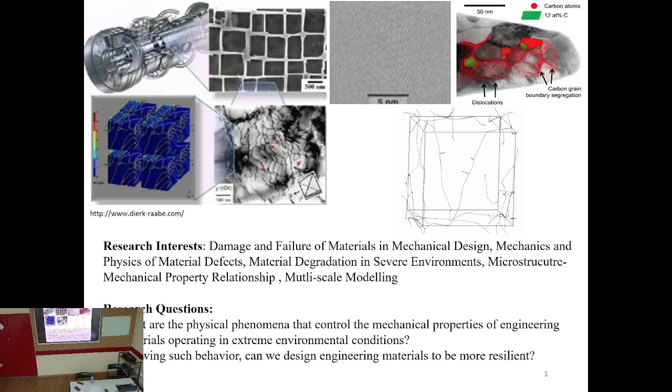Two main questions I'm trying to answer in my research are: what are the physical phenomena that control the mechanical properties, also in extreme environment conditions? And if we know this behavior, can we design more resilient, better materials?

So today I will focus first on hydrogen embrittlement, and the outline also includes dislocations, which dislocations we have in different crystal systems, and some strengthening mechanisms. These include solid solution strengthening, precipitation strengthening. I'll not mention grain boundary strengthening or strain hardening, but I assume you guys are familiar with these issues.

Let's start with some basics in hydrogen embrittlement. After some amount of atomic hydrogen, we see a dramatic decrease in macromechanical properties, like the ultimate tensile strength. Sometimes we see increase in yield strength, but ductility is reduced, impact strength reduced, toughness reduced, even at quasi-static strain rates and also high strain rates.

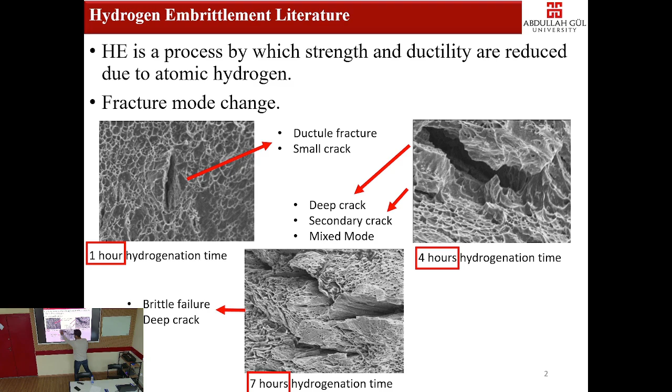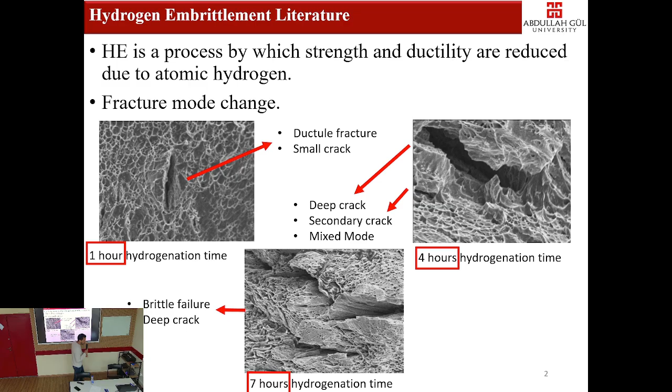We have some experiments, so hydrogen causes some problem in metals, and we have to understand what this problem is. Hydrogen changes fracture mode from ductile to brittle after even 7 hours of hydrogenation. These are the same materials; the only difference is atomic hydrogen. It becomes like, we have a steel, it becomes like a glass. It's due to just some amount of atomic hydrogen, and it causes catastrophic failure.

So I try to keep my slides at master or PhD level, so I'm sorry about the professors - this could be boring for you. But there are some ways that hydrogen can enter into the materials. I just try to summarize. So in order to talk about hydrogen embrittlement, hydrogen should be there.

The first way is during manufacturing, could be casting or other methods. During solidification, the solubility of hydrogen in liquid is pretty high. During solidification, some of this hydrogen just stays there. We call it as-cast hydrogen, due to the casting.

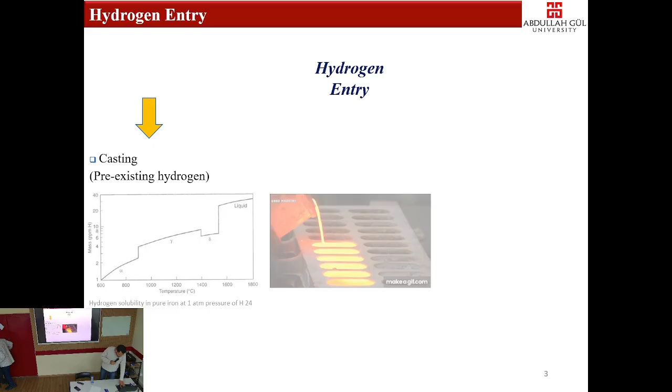After some manufacturing operations like laser cutting or welding, we get more hydrogen, and during use in the environment, hydrogen can also diffuse into the materials.

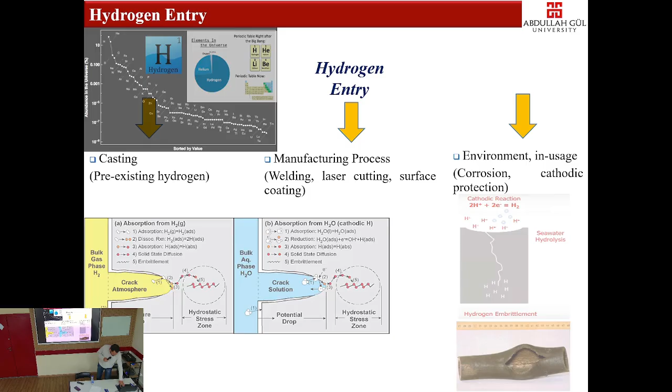Once hydrogen diffuses into the material, it can be localized at trap sites, or it can continue its motion, like diffusible hydrogen or trapped hydrogen. The trap sites are grain boundaries, phase boundaries, voids, inclusions. We have several trap sites for hydrogen, and mostly the interaction of hydrogen with defects is the main controlling mechanism of hydrogen embrittlement.

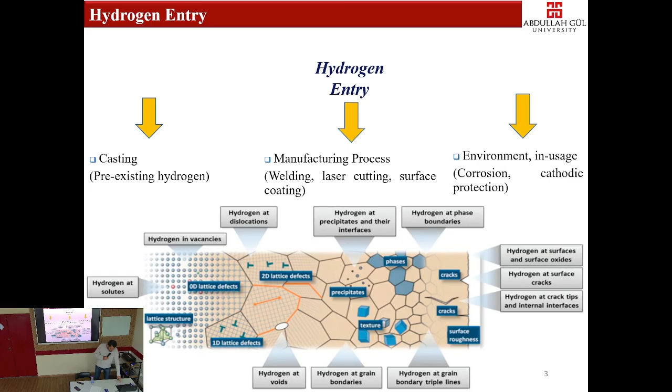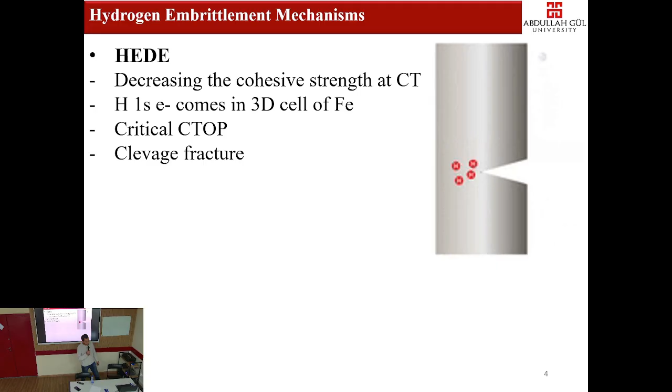So diffusible hydrogen and their interactions with defects - there are several mechanisms proposed to understand, to explain hydrogen embrittlement. I tried to summarize some of them. Hydrogen enhanced decohesion is one of them. It states that hydrogen, while it's moving, decreases the cohesive energy between the bonding, and it causes brittle failure - hydrogen enhanced decohesion. The second mechanism is hydrogen enhanced localized plasticity.

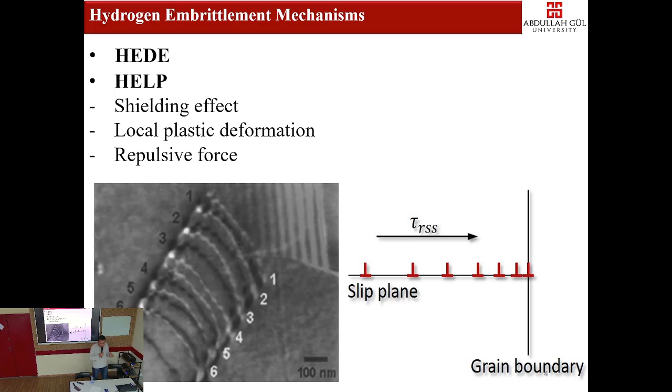We know that dislocations have some stress field, tensile stress field and compressive stress field, and interstitial hydrogen also has a stress field. According to this mechanism, hydrogen can shield the stress field of a dislocation and increase the mobility of the dislocation, creating some localized plastic deformation. Once that localization cannot be accommodated plastically, we have failure.

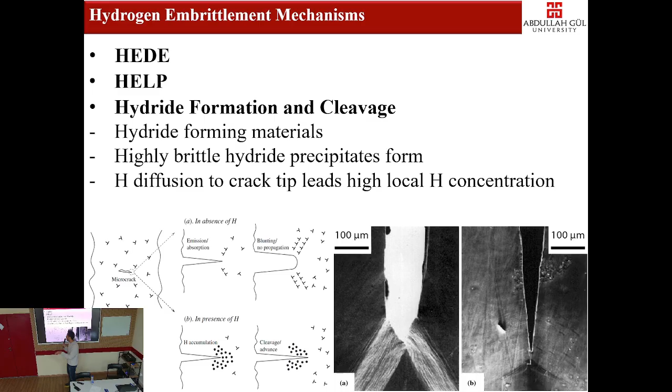So if the hydrogen over metal ratio is greater than 0.1, hydrogen tends to become hydride at the crack tip, and it causes some blunting, and we see some adsorption induced dislocation emission. Depending on hydrogen concentration, we can also observe the coexistence of different hydrogen embrittlement mechanisms. So the real question is, it is still unknown what hydrogen causes at molecular scale, at microscale, and the interaction of hydrogen with dislocations is the real question to uncover the micromechanism or molecular mechanism of hydrogen embrittlement.

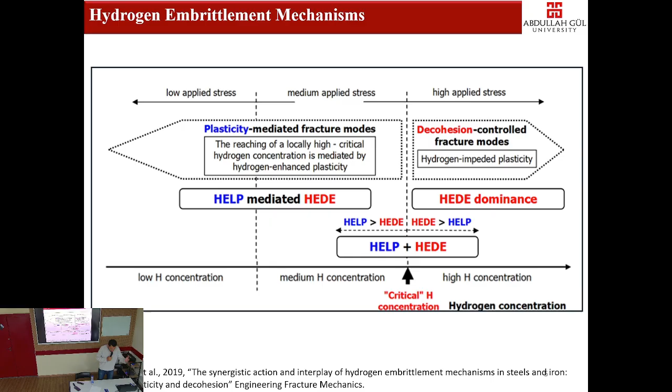So one of the basic questions: does hydrogen really decrease dislocation mobility or increase it? This is very basic. Does it pin the dislocation or increase the velocity? It's still unknown. And when we say dislocation, we have different kinds of dislocations. I will try to explain later.

So if we want to model the dislocation dynamics, we have a model called 3D dislocation dynamics. With 3D dislocation dynamics, you can see the positions and velocity of dislocations at any given time.

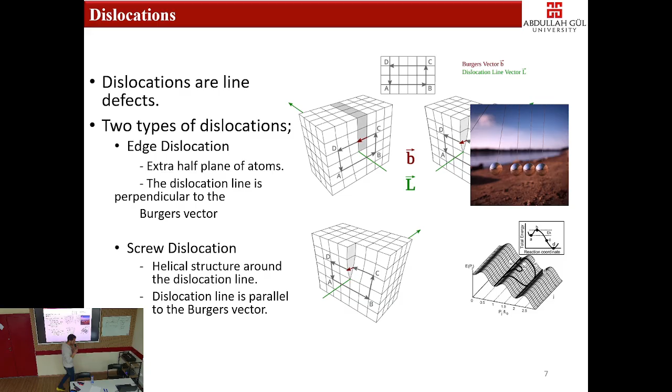Even including pencil glides and everything, even though we have more slip systems in BCC, FCC is way more ductile than BCC, due to the fact that one deforms with edge dislocation and the other deforms with screw dislocation. All right, so here's what we have done in this research.

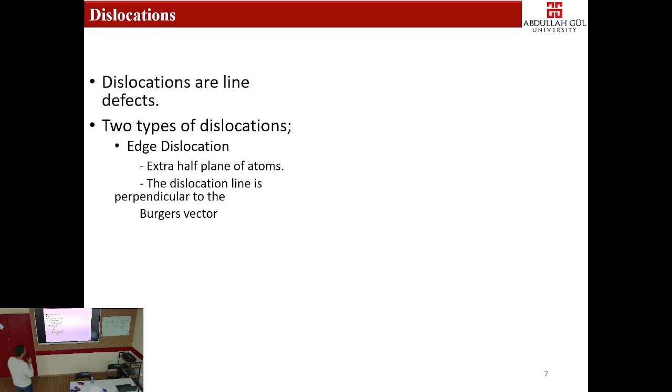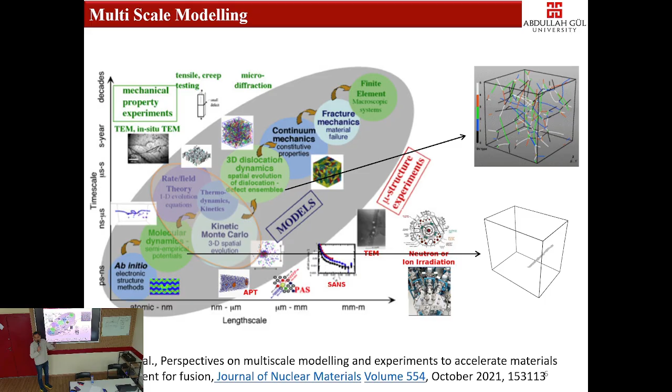What happens if we have hydrogen? If we want to study hydrogen embrittlement with 3D dislocation dynamics, we need a mobility law for edge dislocation. But if we use that mobility law, it's only a function of temperature. We need the effect of hydrogen on that mobility law.

That is why we had an idea: why don't we simulate everything with MD to calculate the effect of hydrogen on both the drag coefficient and the shear stress, because the pinning stress, the critical resolved shear stress, will also depend on hydrogen. So...

We performed several MD simulations. I'm sorry, let me just sit for a minute.

The dimensions are very important to optimize. In order to not create image forces, you have to make your z-axis long. In order to dissipate all the heat throughout the formation and glide of the dislocation, you need to make the x-axis pretty long, because we have periodic boundary conditions. Then, in order to allow kink pair formation—for the 110 plane we also have kink pairs—you have to adjust your y-axis accordingly.

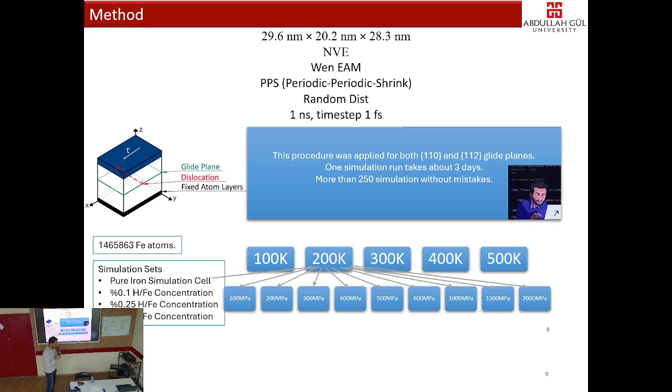One thing that is very interesting for me is we always see a lot of oscillations of the stress around 300 megapascals. We believe we have a resonance there - the natural frequency of the dislocation matches the natural frequency of the system. That is the idea, but we don't know, because we also see these kind of oscillations around 600, 900. Always, once you repeat it, the oscillation increases around these stresses, then decreases and increases again.

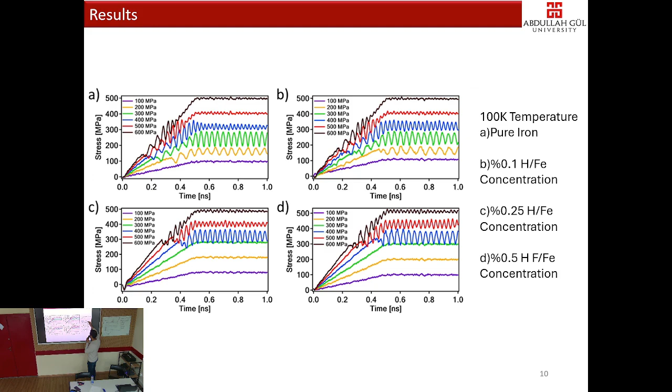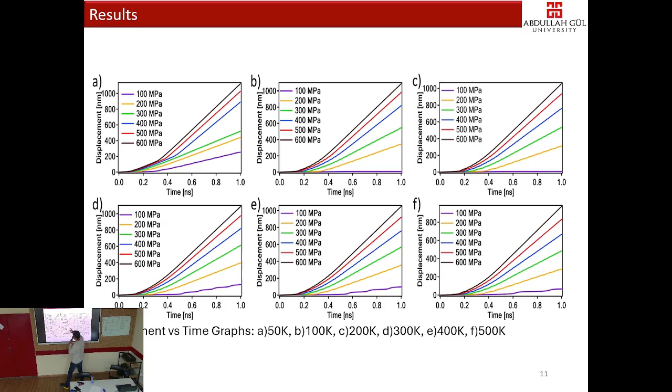This is still an unknown phenomenon for us - we need to uncover it. For 100 Kelvin, we have 0 hydrogen and with hydrogen. You run the simulations, you get the results. The dislocation moves. After 0.5, you have a displacement versus time, for different temperatures. Once you get the first derivative, you can get the velocity.

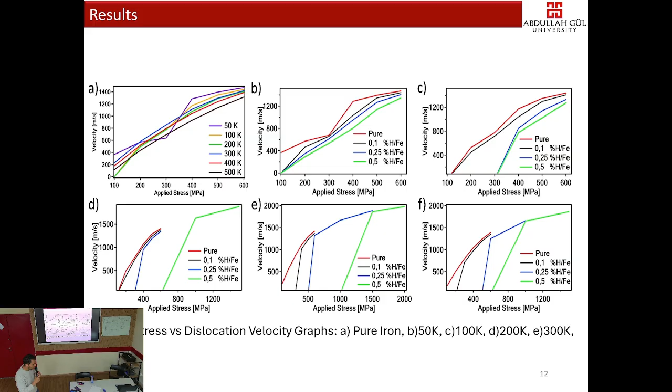This is, I think, pure iron without hydrogen, and these are the different hydrogen cases. One thing you see is hydrogen always decreases the speed of dislocation, but here the dislocation speed is too much. So it always depends on the dislocation speed and hydrogen diffusion. If the dislocation speed is high, hydrogen always tries to pin them. If they are comparable, if the hydrogen diffusion can catch the dislocation, maybe you can see synchronized motion of dislocations and hydrogen, then you can see some increase of velocity of dislocation.

So once you have these results, our idea - in the literature it was only tau over B as a function of temperature. Now the new mobility law that we suggested is tau applied minus tau critical stress, which is a function of temperature and concentration, divided by the drag coefficient, which is also a function of temperature and concentration.

So how can we get this one? We just get the first derivative and the drag coefficient as a function of temperature. Once you plot them, you have almost a linear line. So if drag coefficient as a function of temperature with different hydrogen concentration is almost a linear line, we think it's a slope times temperature plus constant.

But this slope and constant also depend on the legend, right - depends on the other variables. So B, the drag coefficient, is a function of a slope, again a function of hydrogen concentration, times the temperature plus a constant, which is a function of concentration. But we don't know if it's linear or parabolic. Then you get B0 as a function of hydrogen concentration, B1 as a function of hydrogen concentration, and they are also linear. So we thought B0(C) is B2*C plus B3, B1(C) is B4*C plus B5. So that is the B's part.

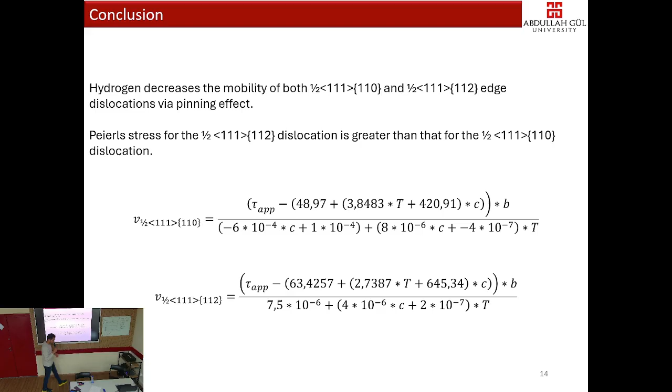So that is the experiment modeling part. Before going to the experimental parts, is there any question? I'm so sorry if I was too boring with the modeling part, because it's very theoretical and maybe it's very new stuff for you. Maybe, so whatever, I can continue and get the questions at the end too.

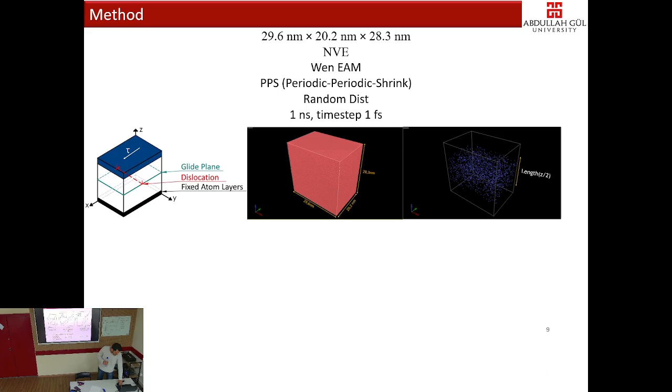It's not clear what the critical trend is. Can you go back one slide? Yeah, I know what you mean here. Okay, critical - you're asking about this one.

Without hydrogen, the edge dislocation moves at 1 megapascal, 2 megapascal. The lattice resistance is very low - whatever you apply, you get dislocation motion easily. But with hydrogen, suppose you apply 100 megapascal, but hydrogen goes to the core of the dislocation and pins the dislocation there. They cannot get away from the hydrogen at the early stages of deformation. The stress needed to get away from the hydrogen pinning is the critical stress in this equation.

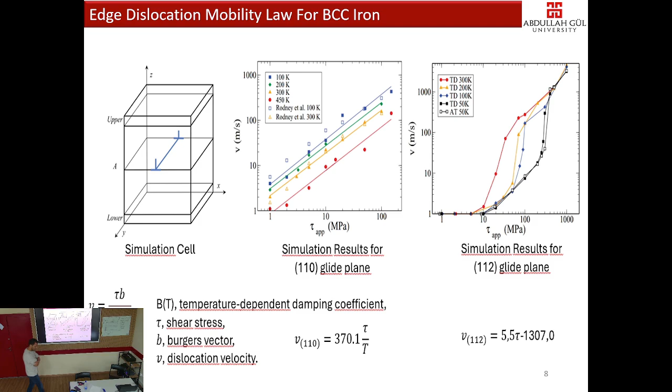The other slide you presented regarding the increase in stress with hydrogen concentration—you showed that the stress is more steep with an increase in temperature. This one, the middle, the middle of the slide, the critical stress. I'm trying to rationalize on a test-wise basis what we've seen during the test: maybe it's due to the fact that hydrogen diffuses, thinking about this continuous yielding or serration effect, where the competition between dislocation and hydrogen—the dislocation traps the hydrogen, hydrogen traps the dislocation—and then you have a new cycle of releasing or creating new dislocation. It's pretty much like that.

To be very specific about the question: I didn't get how the critical stress increases with temperature. It's mobility-wise related, regarding hydrogen pinning dislocations. If you look at lower temperatures, like 50 or 100 Kelvin, you have a less steep curve, and then for 200, 300, 400 and so on, the increase is greater than for lower temperatures. I'm trying to rationalize this regarding mobility, because when you look at this continuous yielding or serrations in the curve, it's pretty much the competition between dislocation mobility and species diffusion.

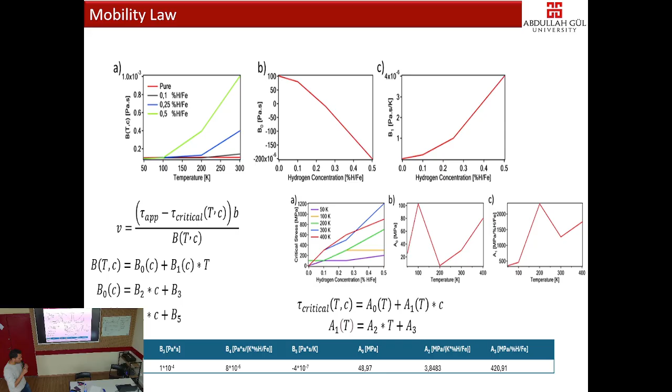That's a very good question. The question is: we understand that as hydrogen concentration increases, the critical stress increases, but why does the critical stress also increase as temperature increases? Of course, we have another point here that decreases, but in experiments with very low hydrogen, we can see depinning and also synchronized action. Here we only see pinning of hydrogen. As temperature increases—maybe because you do relaxation before going to the simulation—you're putting hydrogen at the global minimums, but at 100 Kelvin, the region away from the dislocation source could be like here. The local minimums are more here, but as temperature increases, more hydrogen goes to the core of the dislocation, because that is their minimum energy landscape, and they pin more, and we need more stress to overcome. That is why the critical stress could increase. But we have to check if my answer is correct or not—this could be one explanation. That's what I think right now.

Any other question? Yeah, please. Is this 2D analysis or 3D? So you are considering the line of the dislocation with different concentrations of hydrogen atoms along this line?

Correct. So you put all random hydrogen—this concentration of hydrogen is also being considered along these lines.

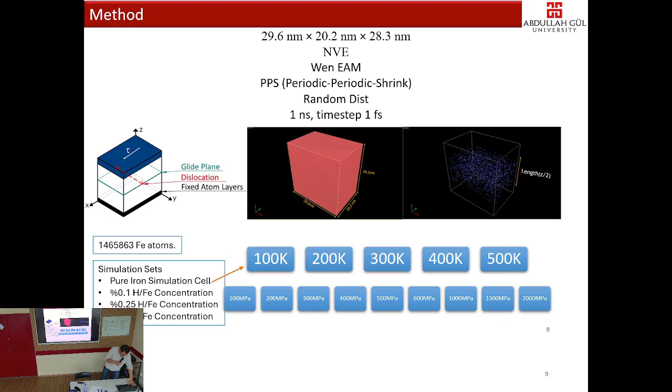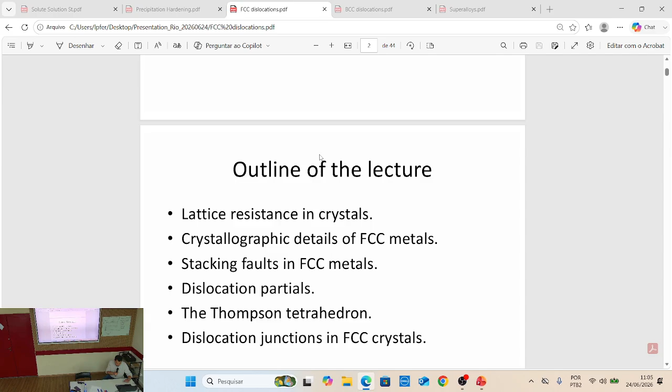I know Professor Leonardo's group is also working on superalloys, so I'm sure you guys know better than me, but I wanted to show some slides, going through quickly.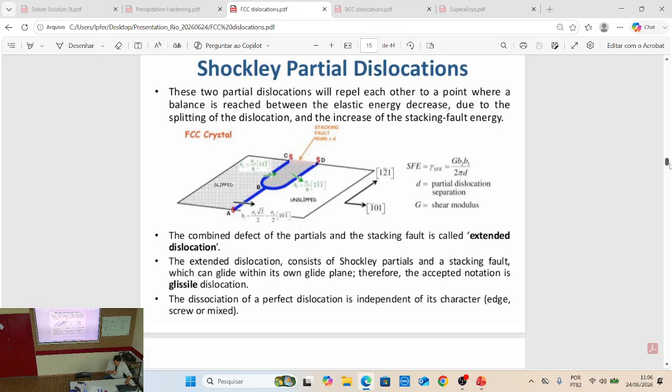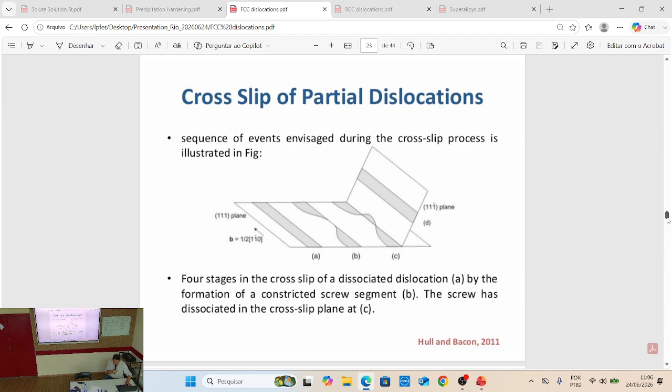But I wanted to show you the Thompson tetrahedron. Each of the four faces is a (1,1,1) plane.

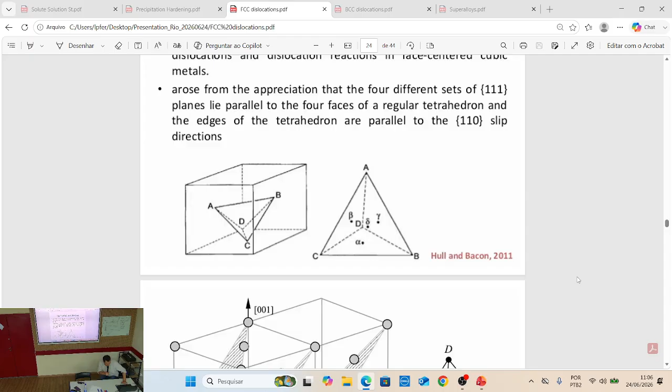The perfect dislocation in magnitude runs from edges of the tetrahedron, AB to BC, giving the perfect dislocation 1,1,0.

If you want to see Shockley partials, look from the corner to the center, A to beta or B to alpha. This Thompson tetrahedron shows you from center to center.

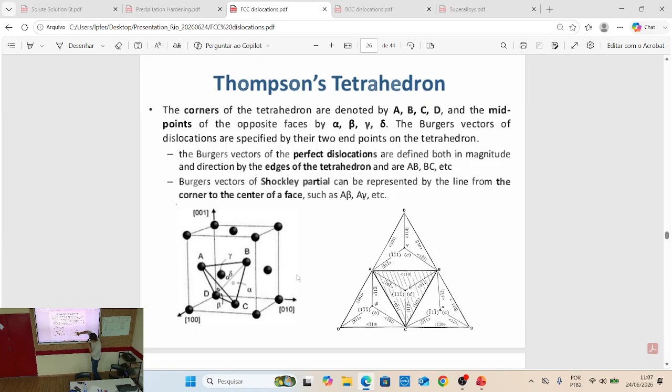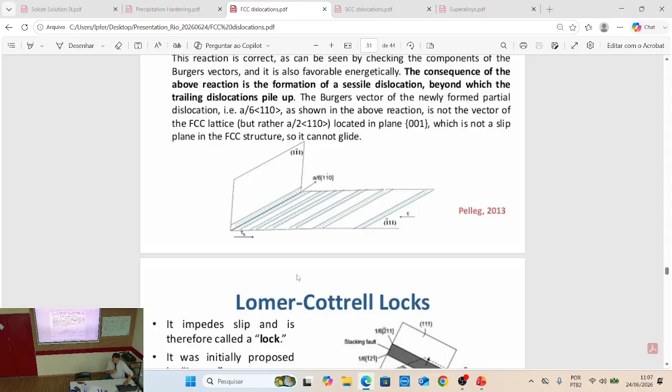We have other dislocation types like Frank partials or stair rods. These are Frank partials and Lomer-Cottrell junction stair rods. The energy is very low, you cannot overcome that. So this is FCC, now for BCC.

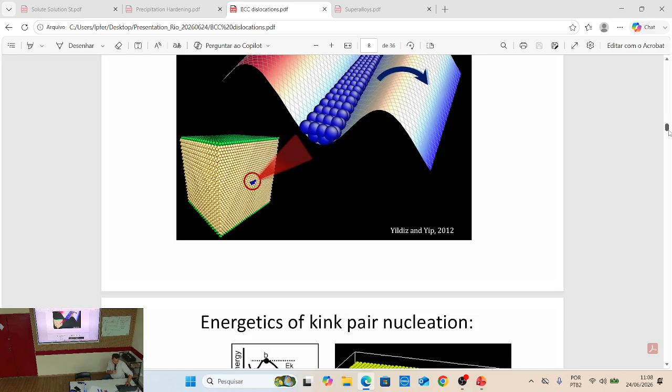As mentioned, we have 48 slip systems, and screw dislocation motion occurs with kink pair formation and nucleation. The mobility law for screw dislocation involves activation energy.

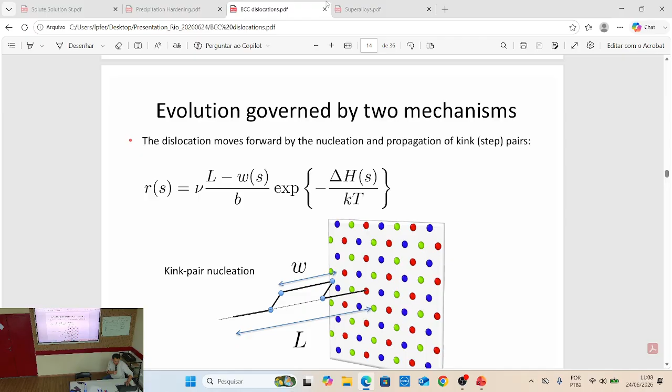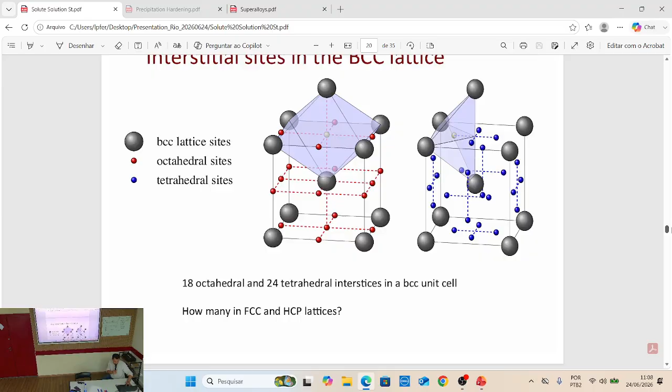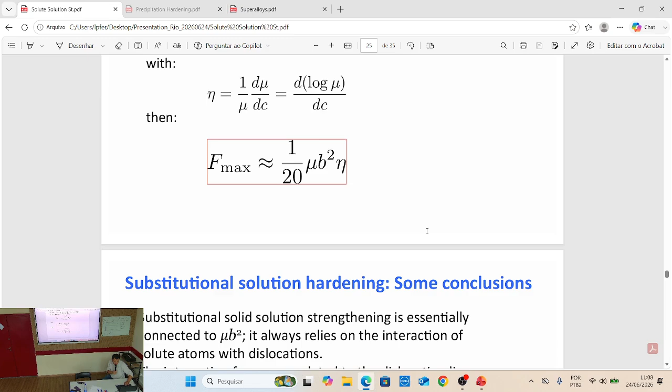We talked about solute solution strengthening. There are two effects that affect it: size effect and modulus effect, modulus mismatch and size mismatch. In total, the solute solution strengthening is GB squared, square root of C, as I wrote before, with size mismatch plus one over twenty times modulus mismatch to the 3/2 power.

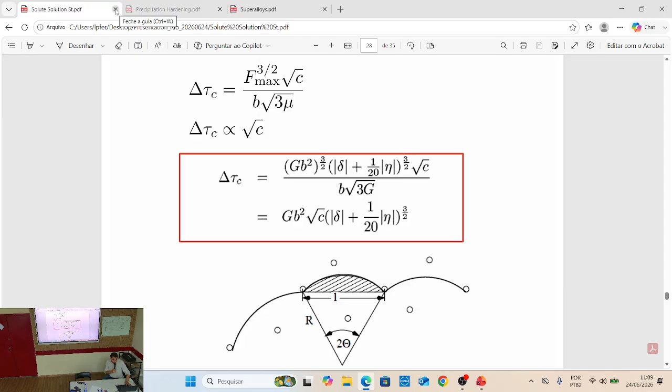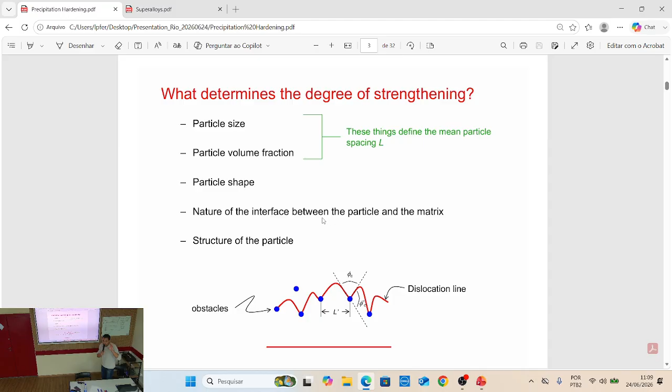This is solute solution hardening, but for nickel superalloys, precipitation hardening is the main strengthening mechanism. We have several types of precipitates, and the degree of strengthening depends on particle size, particle volume fraction, particle shape, structure of the particle, and the interface between the particle and the matrix. We have more mismatches and several different mechanisms.

Let me go through this slide quickly. If the particle size is low, we have coherent particles, and we can cut through them. As particle size increases, we get a benefit in strength, but this depends on aging time. After a certain point, you get bigger precipitates but lose coherency, leading to overaged incoherent particles, which are not good. So metallurgists need to find the critical aging time and critical particle size.

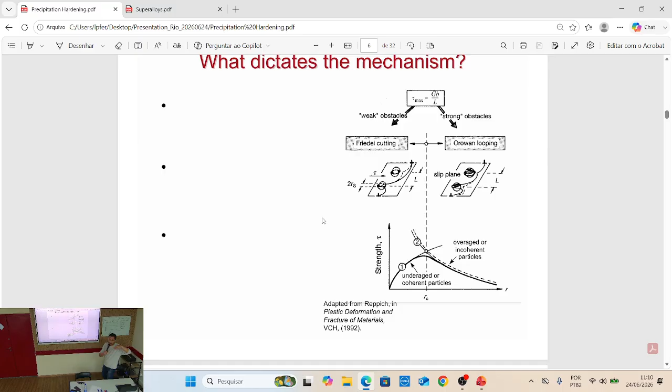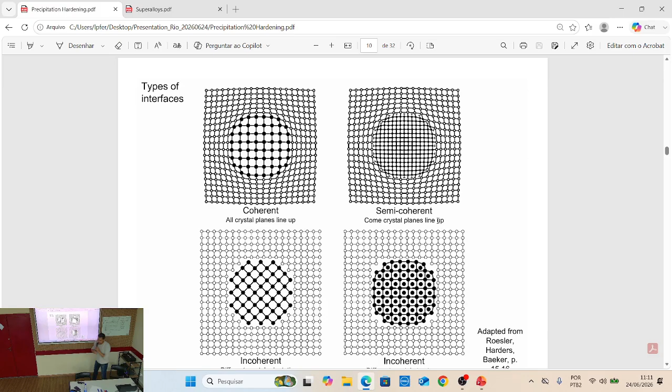These are the particle types. You can have coherent, where all crystal planes line up, semi-coherent, where some crystal planes line up, and incoherent, which can be of two kinds: different crystal orientation or different crystal structure.

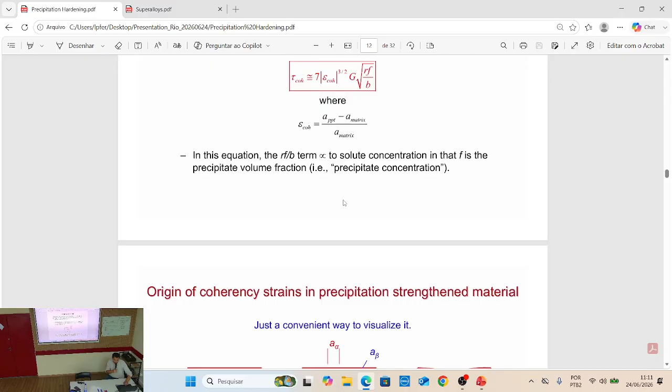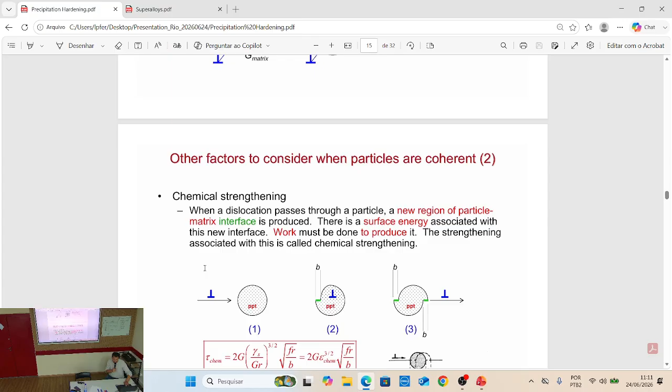Once we have a precipitate and matrix, we have six different kinds of mismatches. There's coherency strain, which is a function of lattice parameter mismatch, with the formula shown here. The second mismatch is chemical mismatch, which is not very dominant, but we also have chemical strengthening between matrix and precipitate.

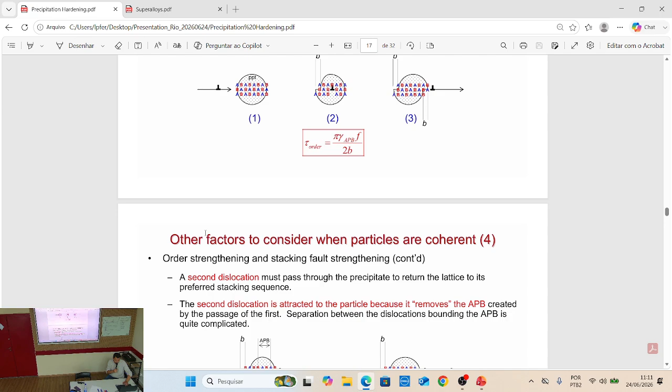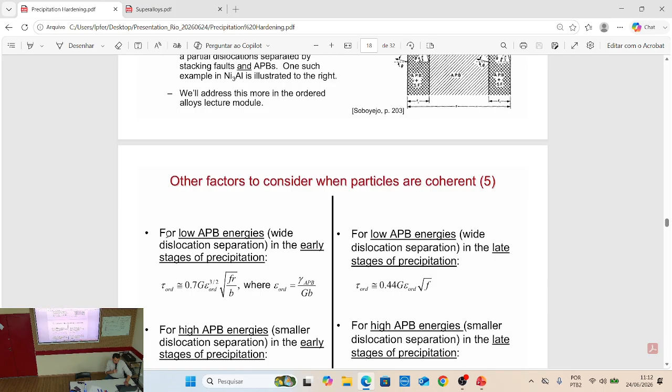We have stacking fault energies and antiphase boundaries, like in the gamma prime phase. These can be ordered for low antiphase boundaries, at the early stage of precipitation versus the late stage of precipitation.

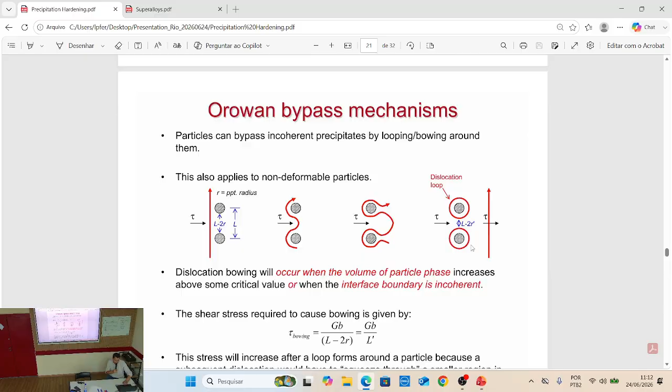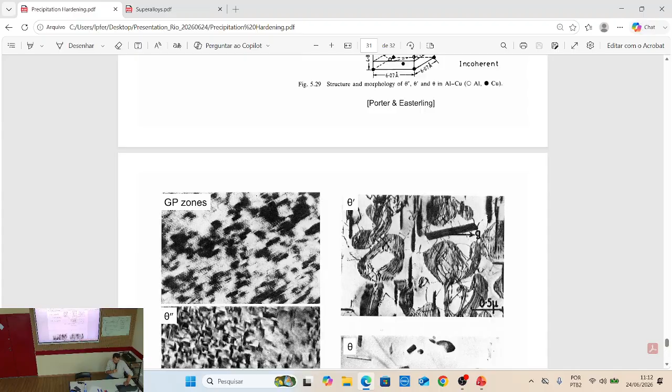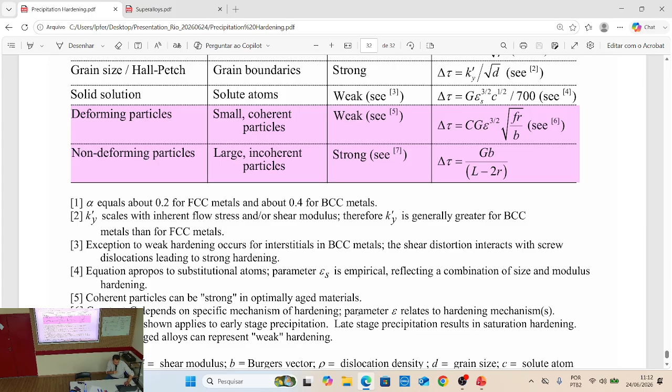At the end of the day, the Orowan equation is very simple, shown here. The equation used for deforming particles is this one right here. C depends on the specific mechanism of hardening, and epsilon relates to the hardening mechanism. For Orowan looping, it's GB over L prime, the spacing between particles.

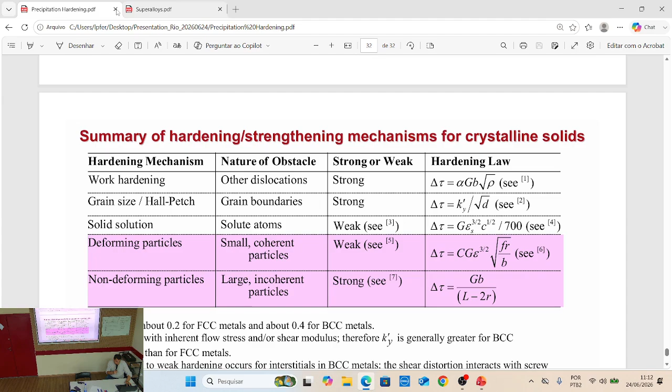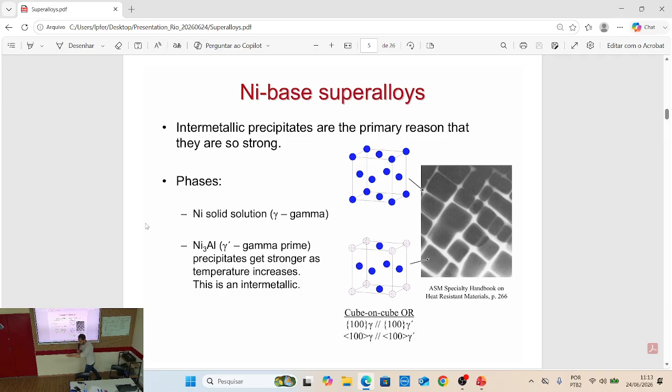For superalloys, you guys know better than I do, but we have ordered and disordered intermetallics, such as when working with the gamma prime phase. For one atomic displacement in FCC, all the atomic arrangements line up.

But for gamma prime phase, once you take one atomic step, you create disorder, these are antiphases. In order to return to the original position, you need two atomic steps.

Before, H dislocation was 1/2, 111, 110, but for nickel-based superalloys, for gamma prime phase, we have a super dislocation. It is not 1/2, but instead 1. So the super dislocation causes not Shockley partials, but super partials.

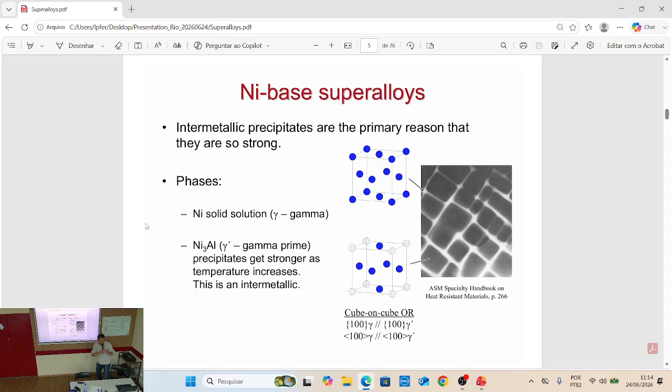Here we have super partials, and in between them we have an imperfect zone with nickels and aluminiums that are not lined up. This is the antiphase boundary.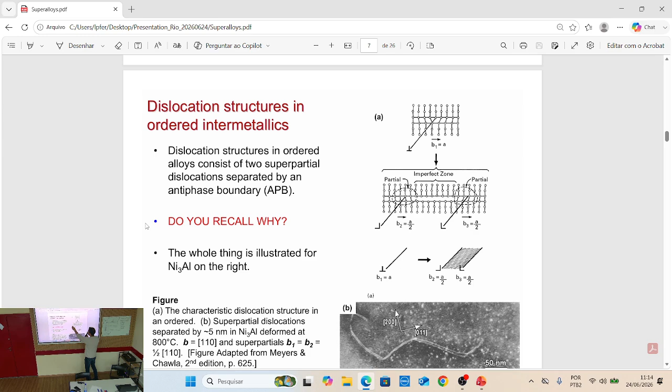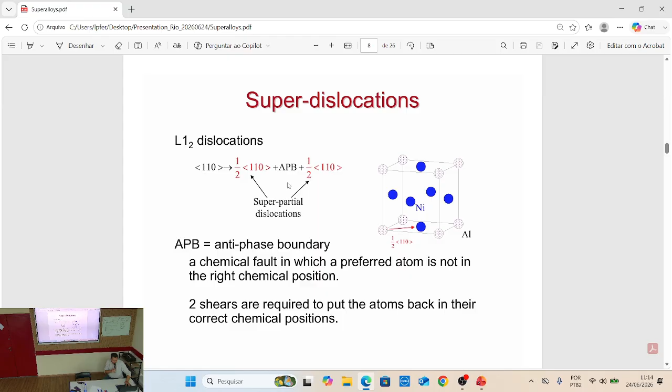This superpartial will also dissociate into Shockley partials. Let me show you: this is L1,2 dislocation, a perfect dislocation with two superpartials, and in between them we have antiphase boundaries.

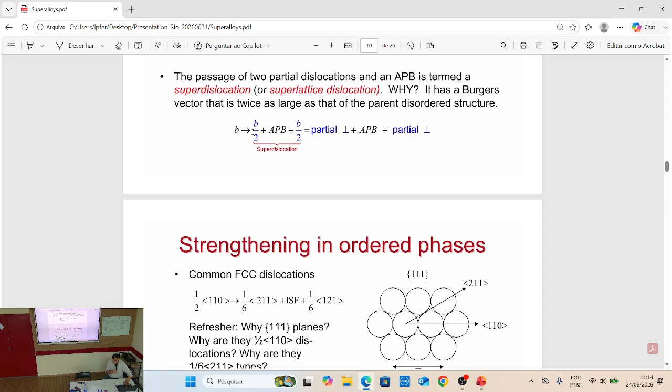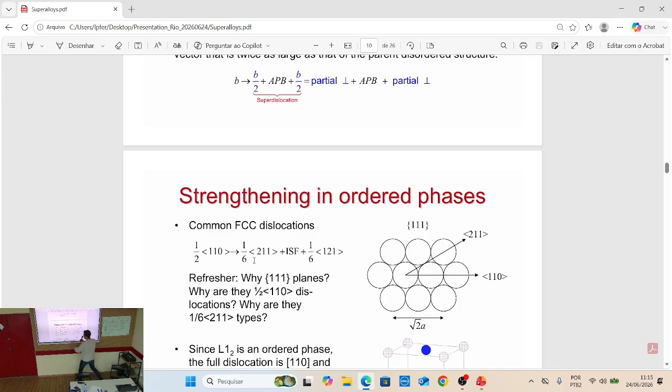This superpartial will dissociate into Shockley partials and intrinsic stacking faults. So with two superpartials, the total reaction of the super dislocation goes into Shockley partial plus complex stacking fault, Shockley partial, antiphase boundary. The stacking fault is 1.5 nanometers, while the antiphase boundary is much larger. This is one of the main reasons why we have very good properties even at elevated temperature.

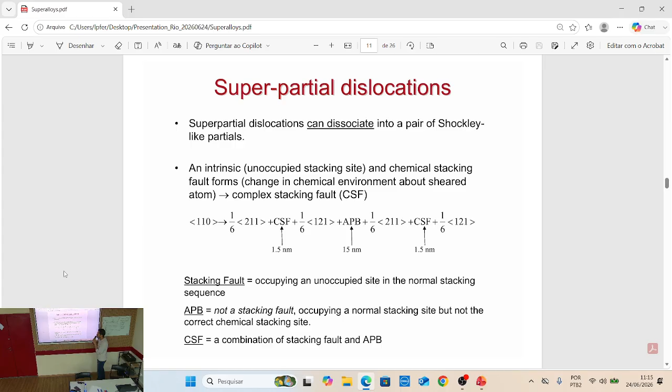This is the deformation, like dislocation movement: Shockley partial, intrinsic stacking fault, and Shockley partial again. This is the scenario in superalloys.

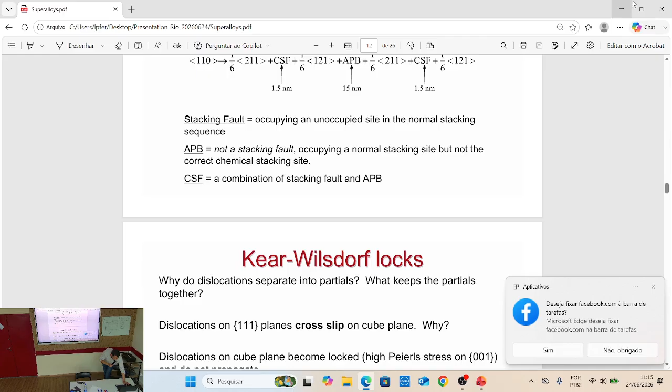I'll not go into Kear-Wilsdorf locks, but I want to continue my presentation very quickly. I don't want to bother you with the experimental part since you have very good facilities, but I just wanted to show you what we have done with experiments.

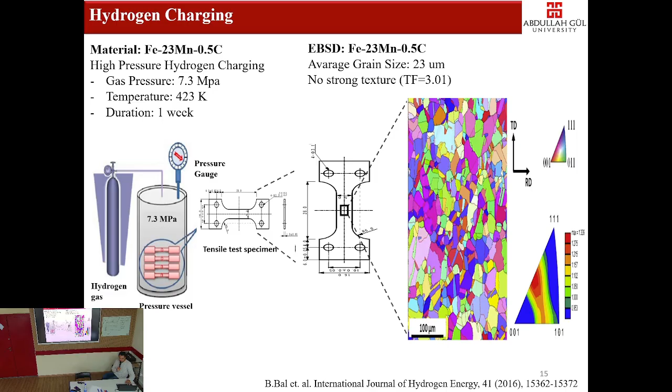This was during my time as group leader at Abdullah Gül University. We had high pressure hydrogen charging and got EBSD, just to show you which capabilities we have experimentally. We did TDS analysis to measure the diffusible hydrogen concentration, and we had an in situ tensile test. This is just a representation.

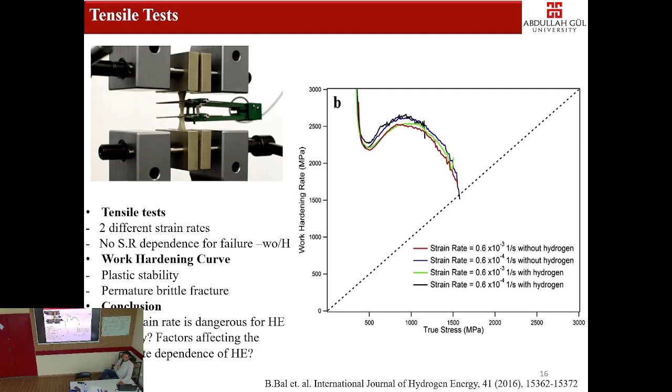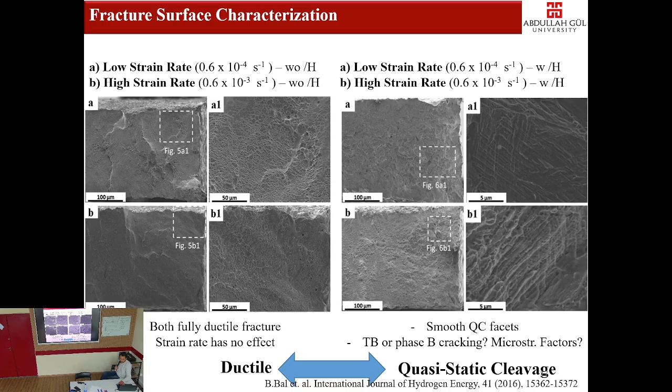We tried the work hardening rate to see if it reaches plastic stability or not. We did some SEM fracture surface analysis and saw both show ductile fracture, but with hydrogen the fracture mode changed from ductile to quasi-cleavage.

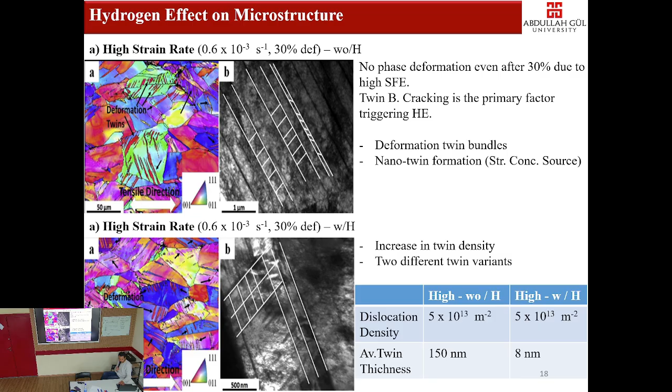These are the EBSD results after 30% deformation. We saw some nano-twins, two different twin systems, without hydrogen and with hydrogen. Hydrogen increased the microstructural features. We measured the dislocation density and the average twin thickness—if it's lower, there's much more hardening.

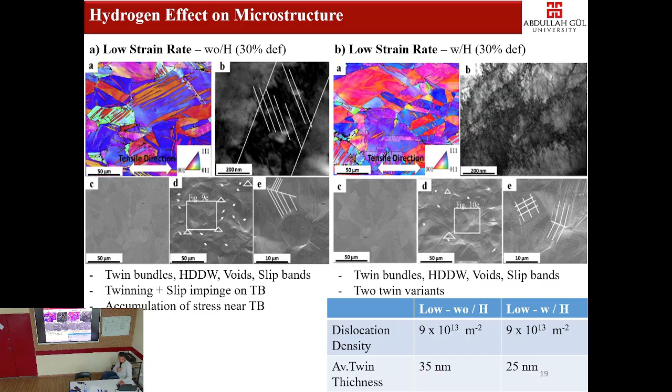Here we have 30% deformation in situ. We did the tensile test inside the SEM chamber in situ. These are the slip bands at 30% deformation, with and without hydrogen, and again we measured the dislocation density.

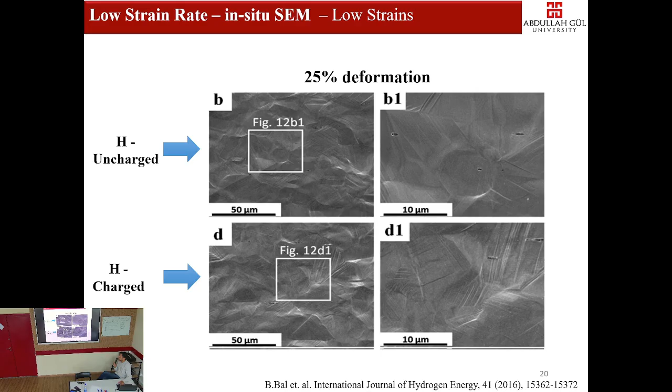At 25% deformation, same result. For TWIP steel we didn't have an established hydrogen embrittlement mechanism, but we proposed one: firstly a primary twin boundary forms, then the nanotwin distorts the boundaries, and hydrogen at the slip line distorts the boundaries further, with hydrogen localizing there.

We get additional nanotwins. Hydrogen always decreases the nanotwin size but increases the microstructural features. Then we have a lot of stress there, and a crack propagates—this is the twin boundary cracking mechanism due to hydrogen that we proposed in the literature.

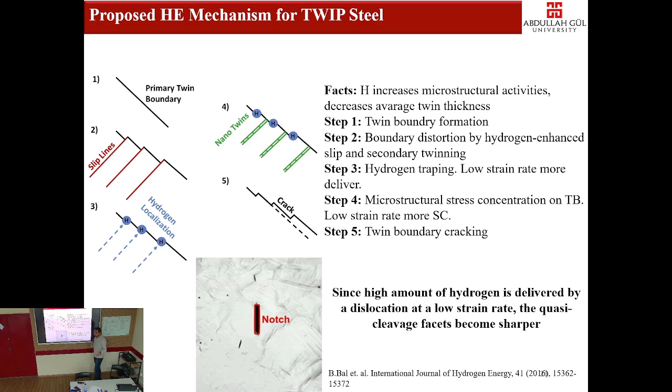Of course, for low strain rate you provide much more time for dislocation-hydrogen interactions, which is why you see more embrittlement. But with ballistic tests, impact tests, and Split-Hopkinson tests with and without hydrogen, we also saw some embrittlement.